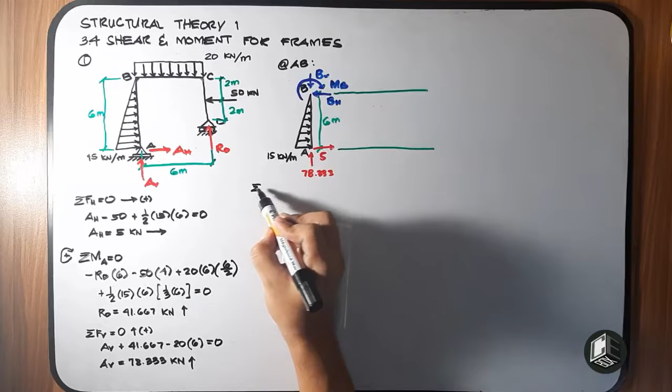Summation of forces vertical is equals to 0. Upward is positive. Isa lang naman ang diyan, ang ating reaction na unknown na vertical, BV. Downward yan, at ito, upward. Therefore, ang ating BV is equals to 78.333 kN.

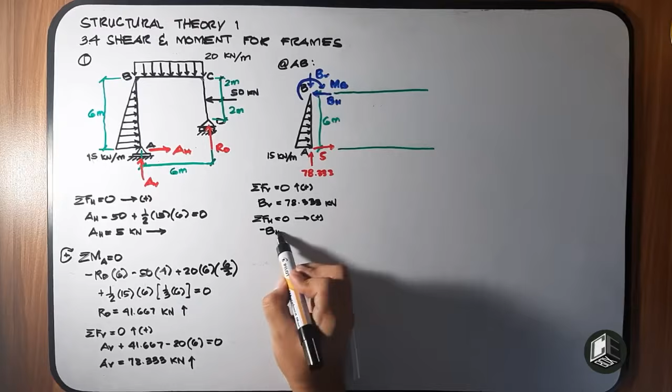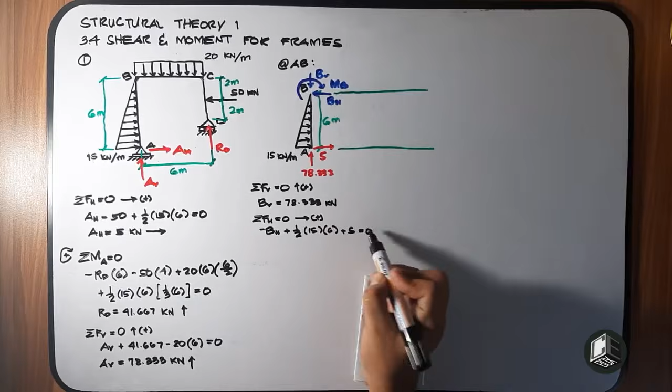Yung ating BH, summation of forces horizontal is equals to 0. To the right is positive. So negative BH plus 1/2 of 15 kN multiplied by 6, plus 5 kN is equals to 0. At ang ating BH is equals to 50 kN.

Okay, so tama yung mga direction. Moment, summation of moment at B is equals to 0. Clockwise is positive, so positive ang moment at B.

Okay, then yung ating 5 kN is counterclockwise, so negative 5 multiplied by 6. And counterclockwise din yung ating 15 kN per meter, so negative 1/2 of 15 multiplied by 6.

Since ang 0 point ng ating triangular load is nasa B, therefore ang kanyang moment arm is 2/3 of 6. So 2/3 of 6 is equals to 0. Kaya ang ating moment at B is equals to positive 210 kN·m.

So since positive, ibig sabihin tama yung rotation natin na inassume. Hindi pa natin kailangan dito kasi mamaya sa BC babalik-balik na natin yung mga sign nila. Okay, so tama na clockwise siya. Okay, so ang gawin natin...

Mag-shear moment na tayo sa AB. Okay, A, B for shear. Medyo nakakalito lang ito, pwede niyo naman gawing baliktarin para di kayo malito, pero anyway ganito kasi dapat, dito na nakasanay.

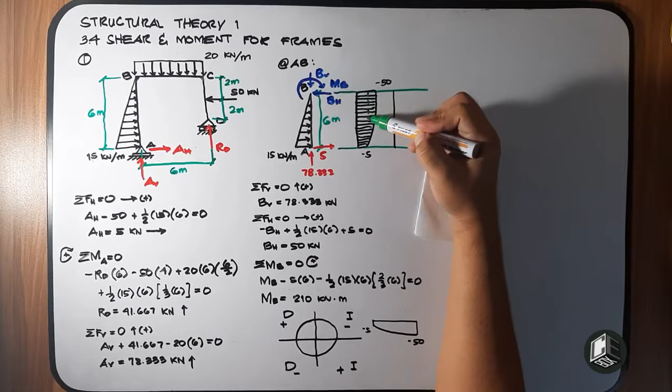0 ito, then yung area ng shear. So ano ito? Dalawang area yan, area na rectangular. Yan, rectangle and isang spandrel.

At ang spandrel natin is 2/3 of spandrel, kasi ito yung... ito yung 1/3, ito yung 1/3, ito naman yung 2/3. Okay, so makuha natin yung area niyan.

So 0 ito, then yung ating, yung 0 minus, kasi negative. So 0 minus this area. Ang area na ito is isang rectangle, this is negative 5 times 6.

Then itong spandrel na ito is 2/3 of 2/3 of 6 multiplied by height. Ang height niya is 50 minus 5, that is 45. At ang makukuha natin diyan is negative 210.

Okay, negative 210, then yung moment natin sa B, ang moment natin sa B is clockwise na 210. So negative 210 plus 210, that is 0.

Next, yung ating curvature. So this is negative 10... 0. Okay, so this is yung ating shear.

Ano ba yan? Nasaan siya? Nasa negative side of the beam, so negative ito, dito tayo mamimili. Then nag-start siya saan? So 5, nag-end up sa 50. So that is negative increasing, kasi 5 to 50.

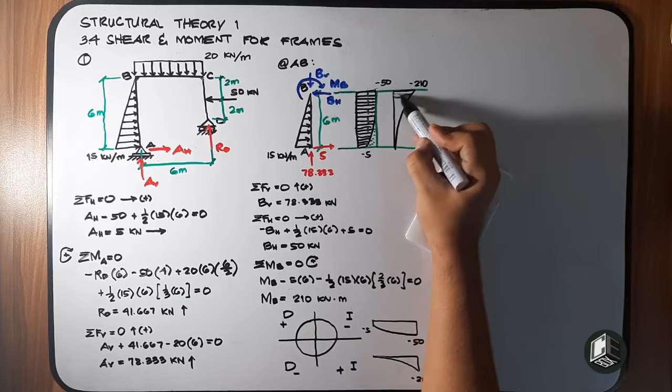Okay, meron na tayong shear moment sa AB.